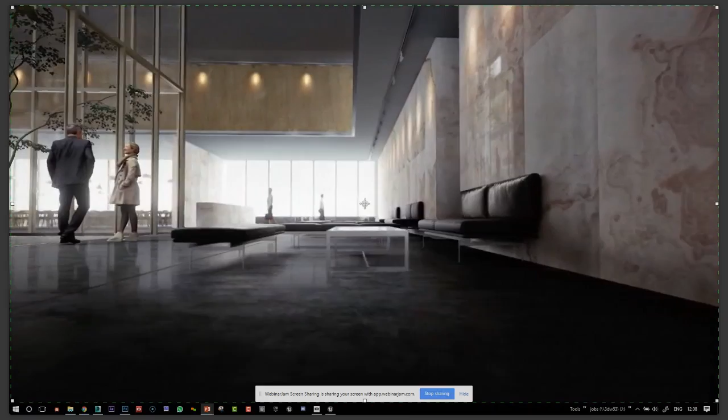So welcome to the Unreal ArcViz webinar number 2. In this webinar we are going to talk about workflow. Like Chris said, the idea is really to give you the tools you need to create projects a bit like right now. So I'm going to show you a range of things, and what we're going to concentrate on today is the workflow to go from A to Z, all the things you need to get cracking with the software.

So for that, we are going to start comparing these two workflows. One I call the V-Ray workflow, and the other one, the Unreal workflow. So what does that mean? V-Ray, I mean by that the offline rendering workflow. I kind of assume a lot of us will have used V-Ray in the past and will know what we're talking about. If you use any other renderer, that's absolutely fine.

The V-Ray workflow is all about things we're very familiar with, and I've just broken it down into this series of steps, which is obviously an illustration. In real life it doesn't necessarily happen systematically like this, especially in ArcViz. We'll start with our 3D model, which will either come from CAD, from Revit or Max, and then we'll apply our materials using textures and using Photoshop as a piece of software for that. And then we'll go and put our lights, environment, the sun, all the V-Ray GI and V-Ray sun and things like that we're all used to.

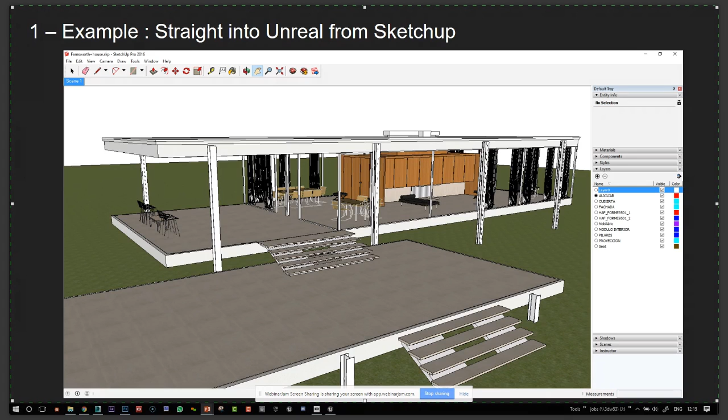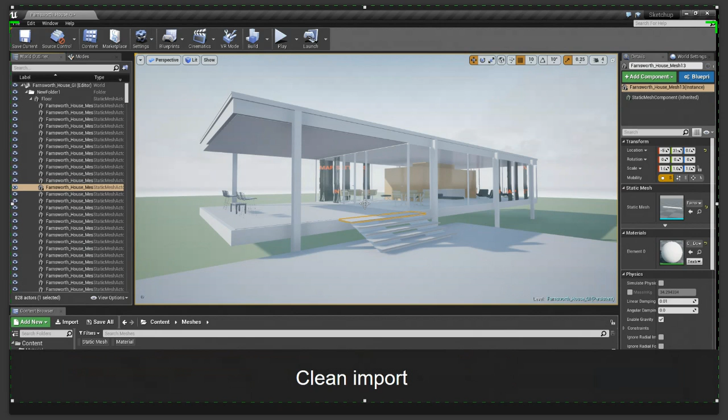So I thought I'd go straight in and show you an example of taking this very simple but nice model I found on 3D Warehouse, using SketchUp and going straight from SketchUp to Unreal. So I exported just one FBX, and it's a pretty clean import, and everything's more or less there. Everything's in the right space, not upside down. So it's worked pretty well. All the furniture is in there, and all the faces seem to be showing.

But there are some problems that we're having. We've got the wrong names in the file, and there's a very high number of objects. So this is something that is going to give us problems in the long term if we want to work with this file. We've also got, in this table, normals facing the wrong way. The faces are facing the wrong way, so that needs to be sorted out. And we see that we've got some pretty nasty invalid light map settings. Also, Unreal was throwing me lots of error messages when I was building the lighting and things like that. So this is something that is not a massive problem to tidy up.

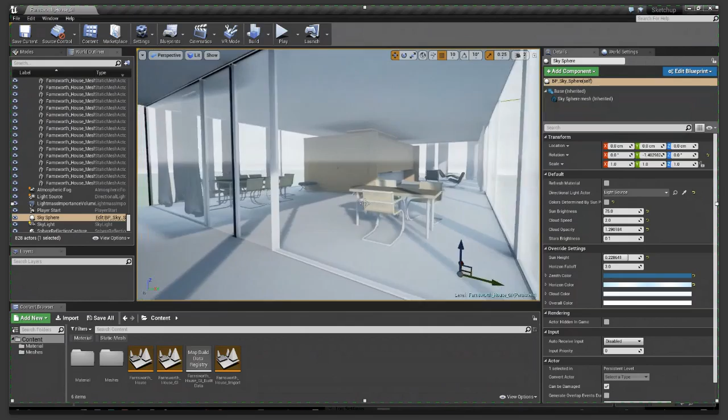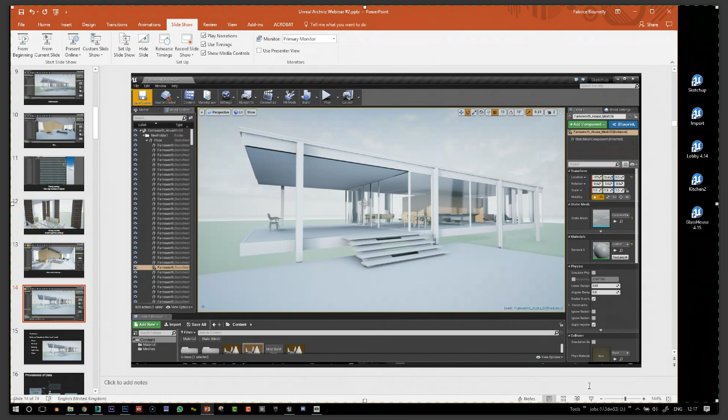So after a bit of cleanup, it's all more or less gone back, and I'll show you the scene here that I've got straight in Unreal. You know, it's not bad. It's really only taking a few minutes, half an hour or so, and I've got all the files, all the faces here. There's no massive holes. So, okay, it works, and while I'm here, to save on time for loading, I'll just keep loading these things after I've finished presenting, and then start again. So yeah, it works, and in conclusion, it's quick and it's valuable for this white card model for pre-visualization.

So now I'll jump back. It's great for concept, for massing, for light studies and views. So it's something that works, but as I said, it's not ideal for long term.

One thing: if you're going to work this way and import files straight from SketchUp into Unreal, the thing to not do is to do what I did and import as one file. The thing to do is really to export different FBX files, at least to separate the building from the furniture and things like that. So we're going to go into more depth on how to organize the file for real time next. So let's have a look at that.

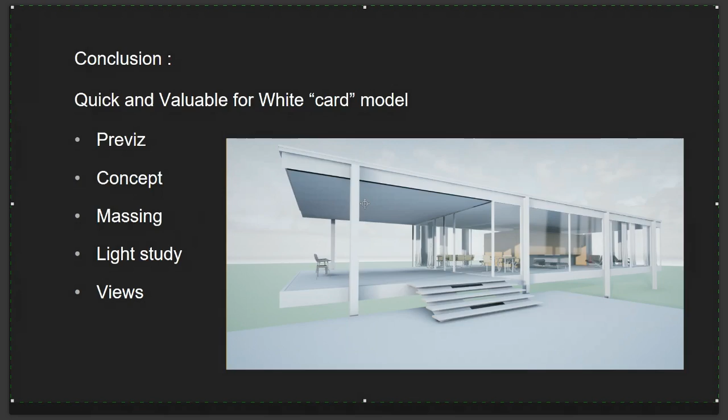So using 3ds Max is the professional workflow today. I haven't actually met anybody who doesn't do that in a professional setting, whether it's a visualization agency or architecture firm. It enables us to have clean geometry to manage, and because again we have to deal with the fact that everything needs to be real time, we need to enable Unreal Engine to render a large number of images per second, so we'll need to optimize.

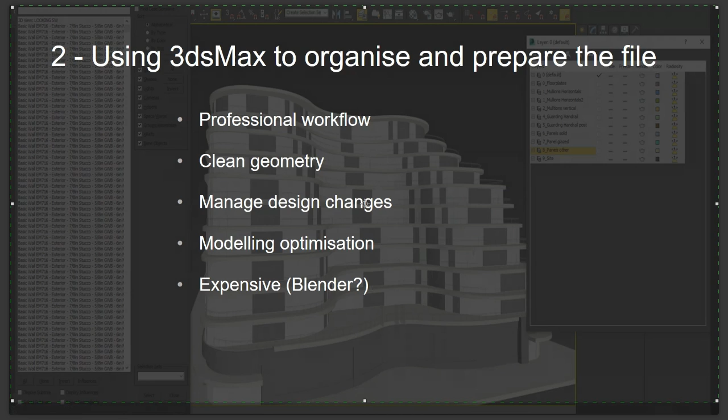The problem with that is, well, 3ds Max is pretty expensive, and so I've just put Blender here because I hear that it's a viable alternative. People are really using it in the professional visualization industry, so it's something to maybe keep an eye on for the future.

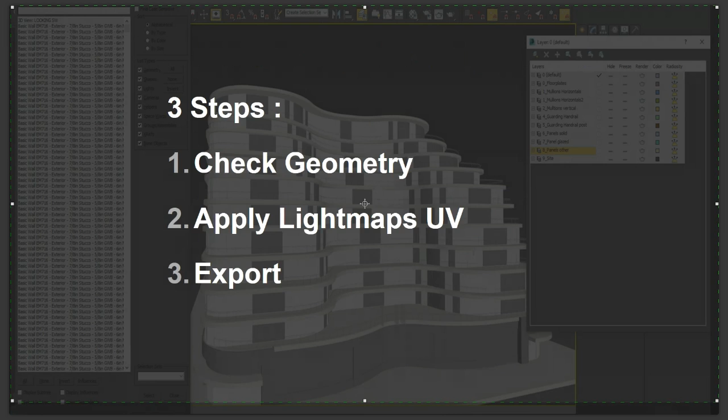So once we've got our application, we're going to have three things to do in there. We have to check the geometry once it's come in, and we have to apply the light map UVs. So we'll go over that in a little bit more detail. And then we have to export. So what does that mean? We will need to keep this file organized.

So thanks to TiltPixel for letting us have this model. It's very kind of them. And so this was a file that came in as FBX. And as you see, I imported it. It was just one FBX, and it's over 4,000 objects in here, and all these came named as BIM-like entities, and they all came in on layer 0. So I had to, not remodel, I had to reorganize this file.

And so if you were to import that and the layers did come through, you would probably have to reorganize the file anyway, because the file that was given to you will probably have XREFs in, and the layers won't make sense. So it's a very good idea to begin to have a little bit of strategic thinking about how you're going to organize that so that you can carry out the 3 steps. One, which is to check. So effectively, you might even have to check each object one by one and make sure they're right, make sure the faces are facing the right way, and so on.

And then we'll have to apply our light map UVs. So we'll need to be able to turn some of these layers off and make sure we've done it all. And then we'll have to export. So again, we don't want to get confused and export things twice and so on. So it's worth having a little think about how that's going to be done.

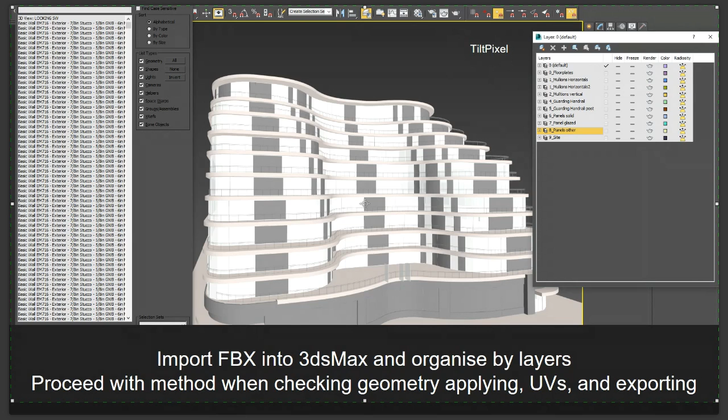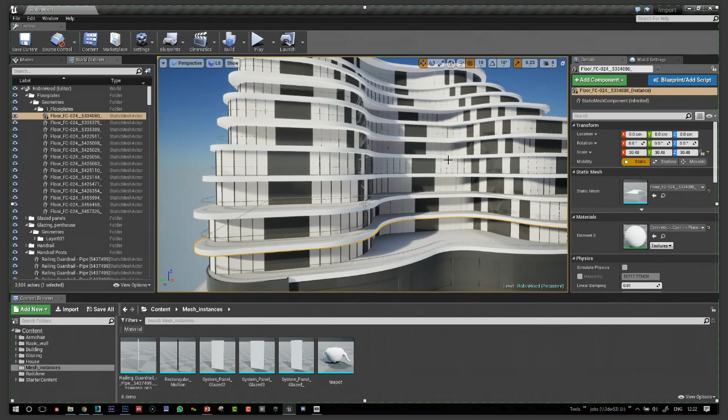So I'll just jump in the UE for this one, just to show you how this building has really come in very, very clean. In fact, I've used the piece of software that Enterprise is currently working on, and that Chris will give you a demo on at the end of the webinar. But these have all come in very, very clean. It was very simple to do.

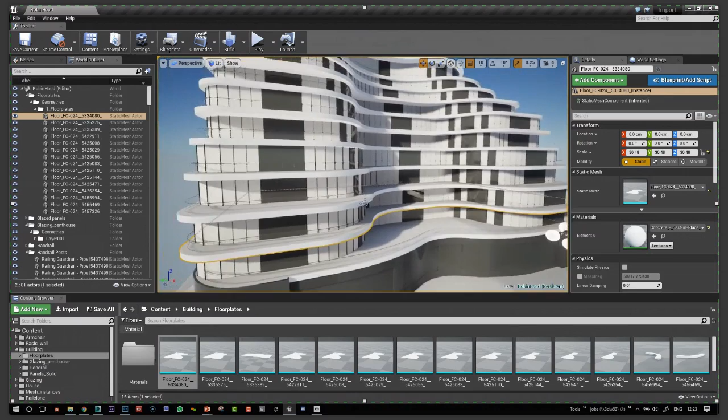I just selected the plates, and they all came in with a proper folder structure and properly named with the original name, not the name of the file, and so on. So that's really exciting for us. So unfortunately, it's not released yet, so we'll have to do some of this manually.

So another thing I wanted to show you in here is how when we import our objects, we have the option to use object instances. So for example, in this facade, all the panels, there's only 3 actual panel geometries that were imported into the software, and all these were placed using a script, which I'll give you the link to in a minute.

But it's a very efficient way to work in Unreal, and this way we can have a large number of objects and a very small footprint. So again, I'll show you a little.

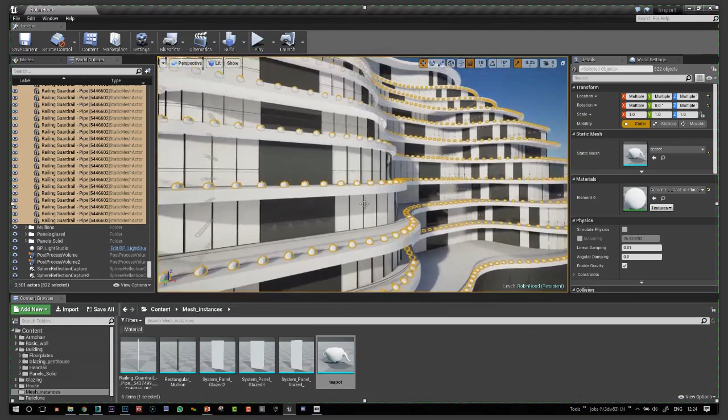So select all these handrails, and then because I thought I can't give a 3D demo without a teapot in it, I'll just show you how that works really well. And I can instantly change all my handrails to beautiful teapots.

But what that's basically illustrating is when we've got design changes to do, if we had to replace all these handrails in Max, 800 objects, and then swap them and re-export them and so on, it would be quite time consuming. Whereas here they've been placed and instanced, and all I need to do is import one other guardrail and swap it, and then job's done. So that works very well.

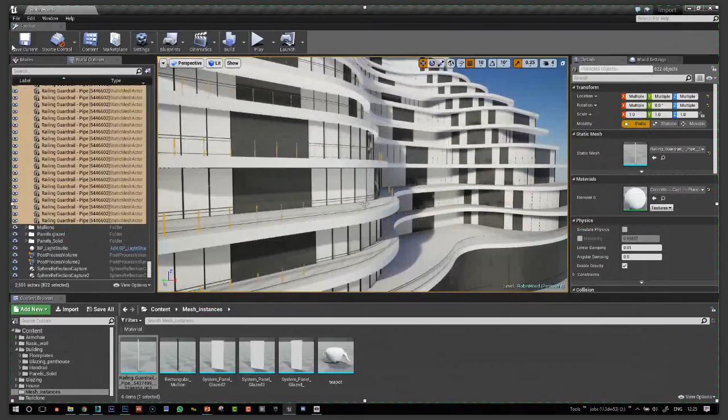Another thing is, now I swap back to my... so if I do my little maintenance, I'll close this down and save you staring at the screen while it's loading, and I'll open my next one. There you go. That's done. So that's that for this model.

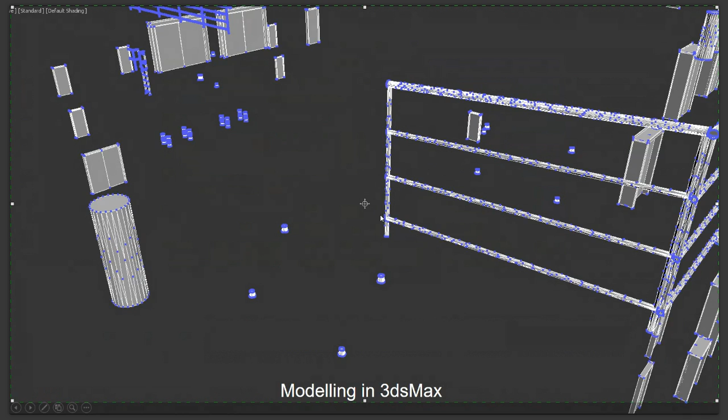One other thing that is going to happen when we start importing data into Max is that we are going to have some issues with the geometry. Some of this could work, but it could cause problems, things which would be slightly undesirable or not enough quality, wrongly tessellated, and so on. So we will need to model in Max as well.

So I've just prepared this little speeded up movie here to show again a sort of best practice. Where's it gone? I'll start that again and fast forward just to show a problem that we're getting here. When this hole in this wall was created using a Boolean, we got these funny lines here coming for us. And then when we do the chamfer, it's giving us a problem.

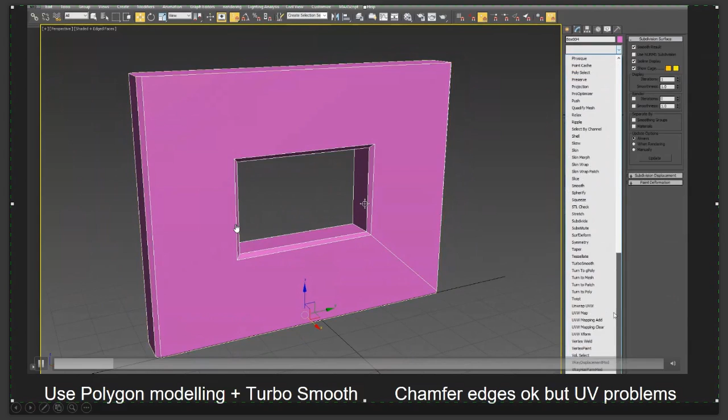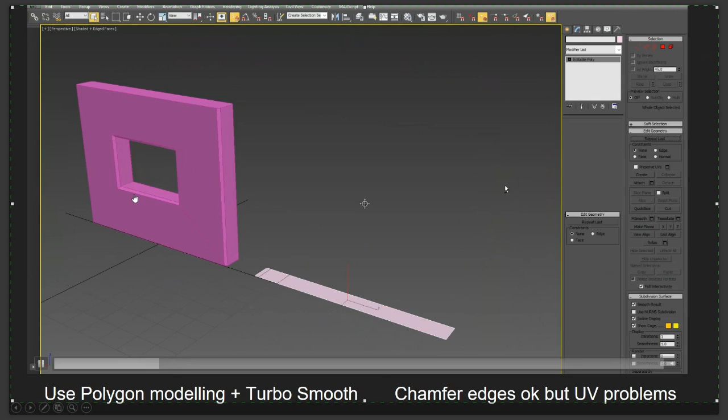The reason I did this is that I get a lot of questions, people asking me, is it okay to chamfer in Unreal? Because it's a very good practice when we model our interiors or furniture to give that chamfer that's going to catch the light, and it gives a much better model overall. So yes, it's definitely okay to do chamfers because it makes our models better.

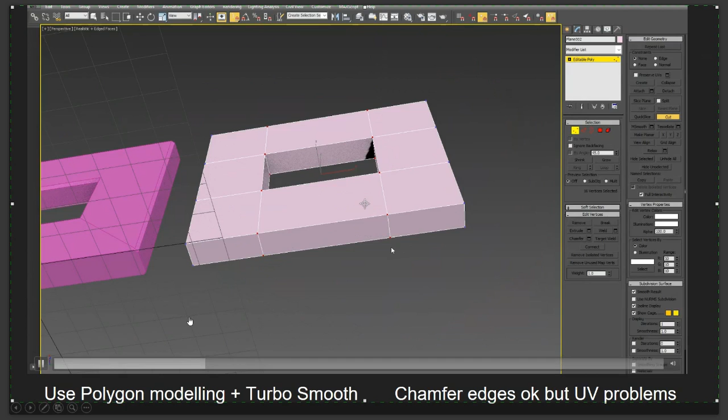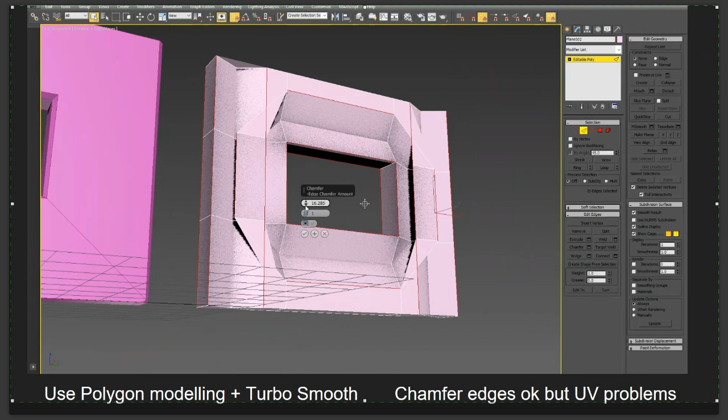But if we do it with the original Boolean and these funny shapes which give us these problems, then we lose the control and it's working against our favor. So here I'm showing you the proper polygon modeling. I'm sure most of you are familiar with that, but if we come from CAD, it might be a little bit foreign to us. It maybe takes a little bit of working out, but once you've done it, it's very easy. It gives us all the control we need over the chamfer, and I'm just going to fast forward a little bit to the UV mapping.

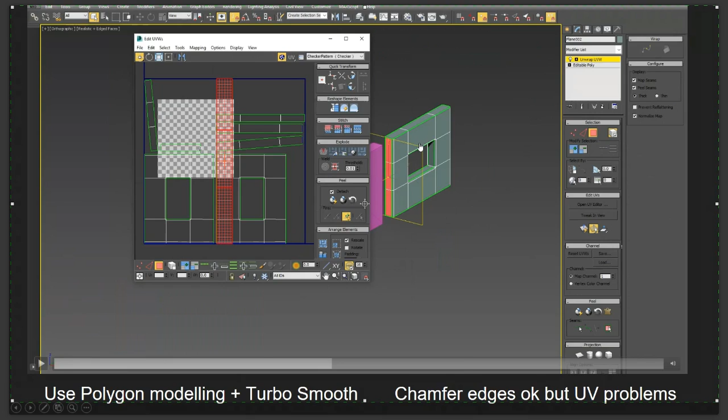We'll go over this in a little more detail, but here you can see that my UV mapping is controlled. I can see where all my faces are, and all these little chamfers are appearing in the right place. Whereas the original UV mapping gave us problems because of the way it was modeled and because of the automatic unwrap. So anyway, I'll carry on and show you a bit more of how we imported some data and used this instancing.

So let's move on to my lobby scene in here. I'll go full screen on that. Typically, in a V-Ray workflow, this whole side of this lobby would have been collapsed into one object, or even possibly this entire set of mullions would be one object. I would have used a clone tool, so it would have been one object.

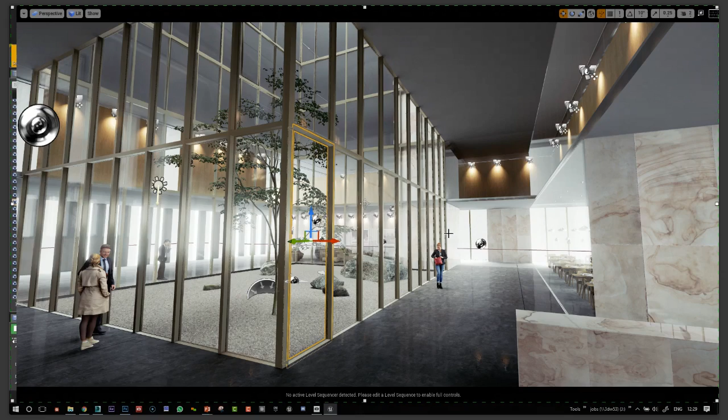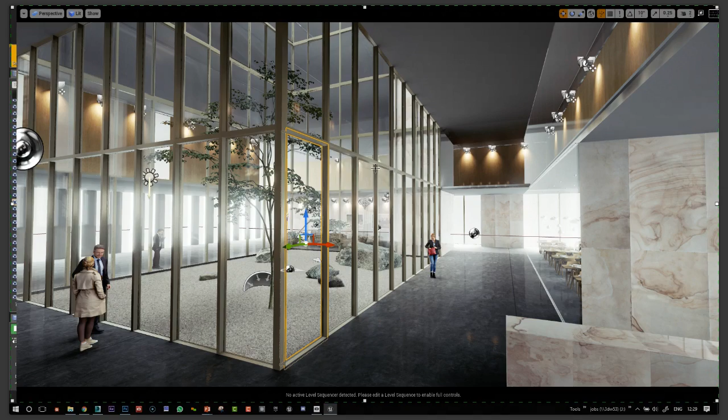What I ended up doing is using these instances. I'll just zoom in regarding the chamfers: the actual geometry is very, very detailed. There's tiny little chamfers everywhere. And so it enabled me to keep this very detailed geometry, place all these individual elements, and then they rendered much, much more quickly than being all collapsed into one object.

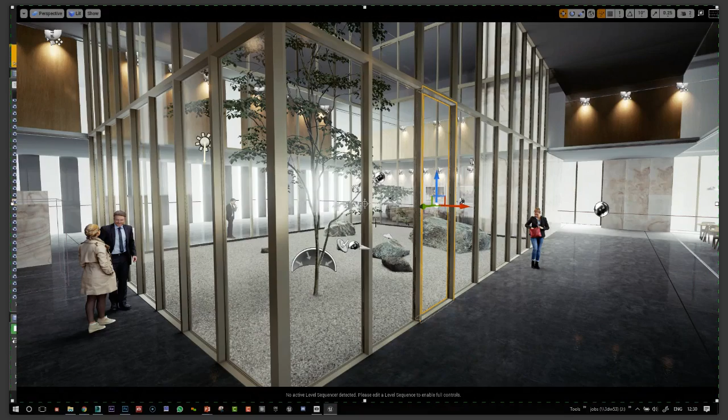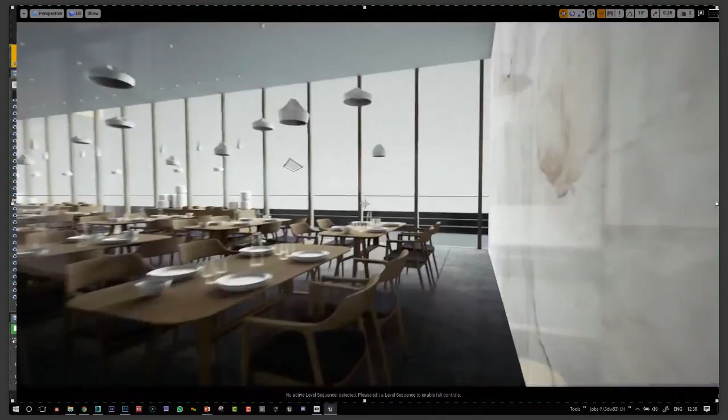For example, these rails that go over the entire length of the scene are very inefficient to render as well, so it would be much better to at least break them up. Another thing here, in this restaurant area, the chairs. I hope I'm not making you dizzy by moving too fast, but the chair and all these objects were all instanced. If I select my chair, you can see that there's only one chair, and it makes it all very clean and easy.

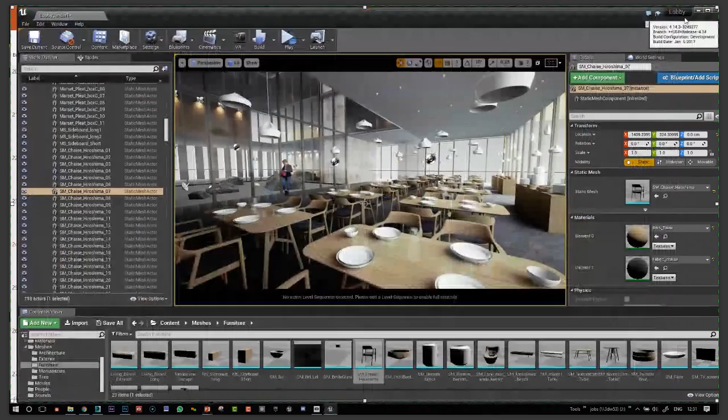And if I want to replace this chair, all I need to do is swap it out like this for another object. So that works very well, and I think Unreal is very happy to deal with things this way. So I'll just carry on. Let me do my little maintenance again, and then lobby, and then I'll get ready for this one.

Okay. Back into PowerPoint. So in the lobby again, this is a scene that was in French. So thank you to Artefactory in Paris for working with me on this, to Eric and Dominique.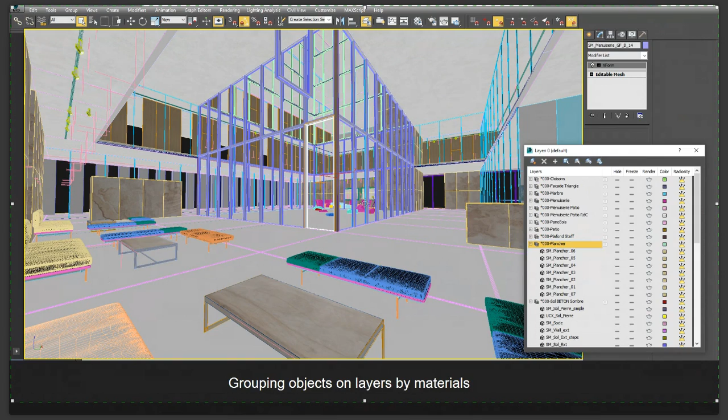And so again, we took great care to separate out the layers. It's rather ideal to not have too many objects on each layer, so that we can really keep track of them, and each one is properly checked. Yes, it does take time, but this is effectively the more professional workflow, where we check everything, and if we've got large numbers of objects, we instance them and export the one object that's been properly modeled.

Something to keep in mind as well is whether the object will be static or movable. By static I mean walls, the glass, the floors, things that are part of the building, and those can be exported as they are. On the other hand, the chair, although it's a bit confusing because here the mobility says static for the chairs, I exported them as movable objects, and these need to be moved to 0, 0, 0 in space before being exported.

So again, it's a little bit of strategic thinking. What is going to be static? What is going to be movable? The movable objects like the plates and the glass need to be placed at 0, 0, 0 in space before being exported. Thankfully, we've got some scripts that help you do that, and I'll point these out in a minute.

But before I do that, I would like to point out this asset naming convention that you can find on the wiki for Unreal Engine. This is something that I ignored at the beginning, thinking I can do my own naming, blah, blah, blah. But to be truthful, I came back to it, because it's very good to know that it's there. If you decide that your things are getting a little bit confusing, this is really here to help. I now apply it for all my static meshes and textures and so on, and it's worth knowing about.

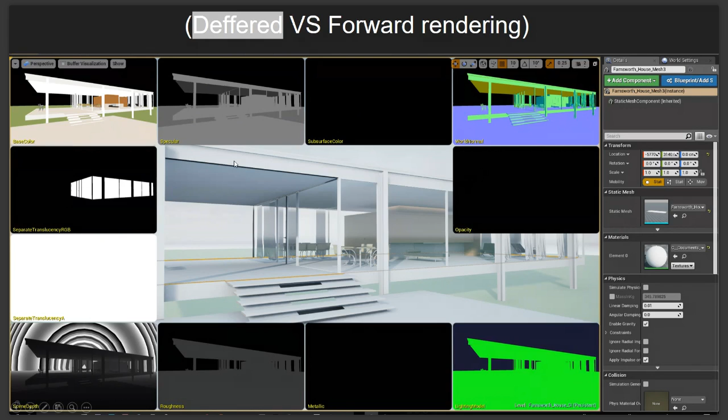But as opposed to forward rendering, which is the way V-Ray works, where we've got the camera and V-Ray just fires a ray from the camera, and when that ray hits the geometry, it queries what's going on with the lights, materials, and so on, and returns a pixel. So there's sort of one pass, and then the deferred rendering, I think it might be 7, or I don't know quite how many. So with that in mind, this is the new workflow in Unreal.

We've got our skylight, and within that skylight, we will put whether it's the default Unreal Sky, we've got HDRs, we've got also the possibility to add blueprints to illuminate our scene, or to give the sky illumination. And the skylight is going to be the element which will throw the light. So it'll take the color of the environment.

What Unreal also will do is use the environment color. So this is where you see the different renderers at play, where in V-Ray, for example, if we had an environment color and then a skylight, the environment color would be completely ignored, would be overridden by the skylight. In Unreal, that's not the case. They will both add on top of each other.

Here again, also the atmospheric fog will contribute to the lighting of our scene, whereas in the V-Ray workflow, what's done most of the time, for example, is to add the fog in post-production. So the fog will have no impact on the color of the scene or the color that the skylight will take.

Next one is the direct light, the sun. That's pretty straightforward. There is no sun. It's just the direct light. So in V-Ray, we've got the V-Ray sun. Here it's just the direct light, and obviously the particularity of the direct light is that all the rays are parallel. So that's what makes it look like the sun.

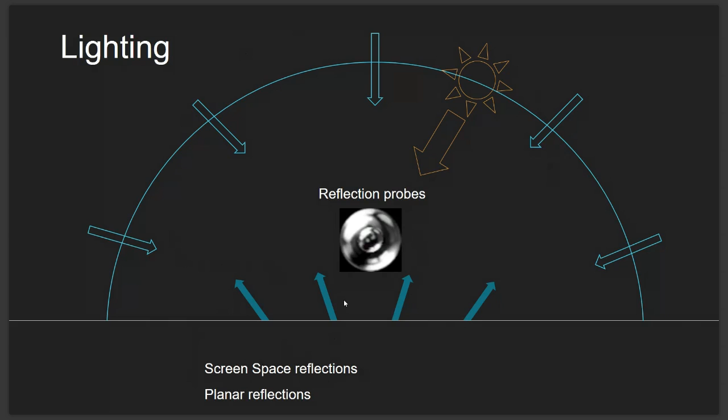So how do we get a clean render with these soft shadows, which is what we're trying to achieve in all our renders? For that, I'm just going to show you a little bit of the setup I've got for this kitchen scene here.

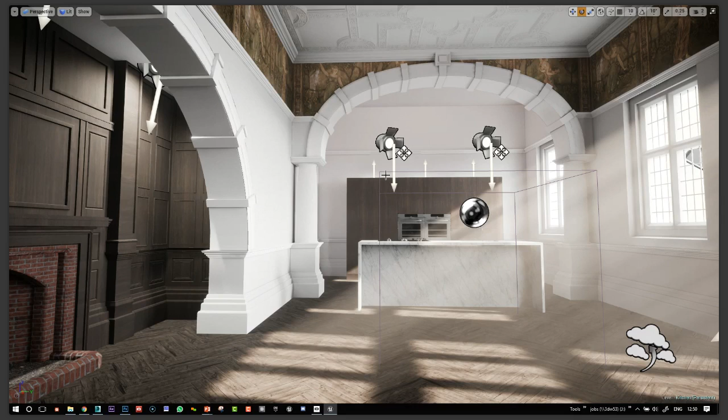So here, what you want to do when you have your scene is press Alt and 0 on your keyboard, or go to this visualization and select light map density. This really gives you this very matrix-like view - and it really is like the matrix, because it's showing us all these grids on these objects.

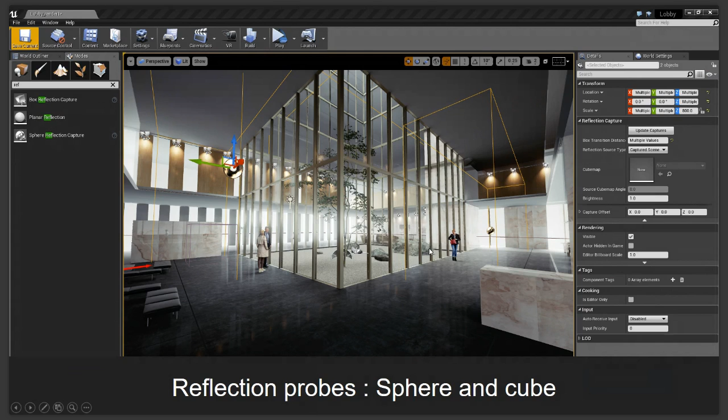Another thing to know about these reflection probes is that by default the resolution is quite low. If you go to Edit, Project Settings, and click on the Rendering tab, you'll see that you're able to change the resolution of your reflection capture. Maybe play around with that.

I would say before a presentation, or if you send your project out, turn that up. Or when you finish working with your project, turn it up. When you're working with the probes, it makes things a little bit slow, and there's a bit of a delay, so it's a bit annoying. Maybe keep it low when you're working, but it's good to know that you can up these for the reflections.

I'll go a bit quickly because I see the time is ticking, but this is planar reflections at work in this lobby scene on that floor. Here you can see all the reflections are accurate, the mullions are reflecting in the floor, the lady is there, and so I systematically use the planar reflections for the floor now. It works a little bit differently, gives slightly different results, but is very accurate.

Just to know that, obviously, they're very expensive in rendering time, so you can't use too many of them. So that's the planar reflections.

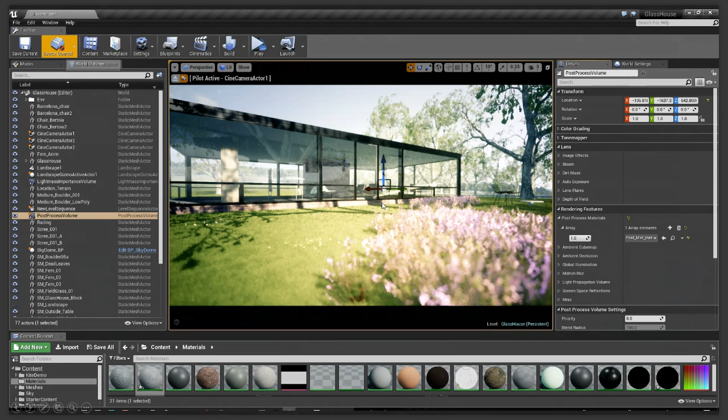All right, so just to finish, I'm going to give you a very quick one on the post-process. We'll talk about that again in the lighting, but this is very powerful. There's a whole subject in itself, and just to show that's the difference between an image which is pretty flat and then with a bit of post-process.

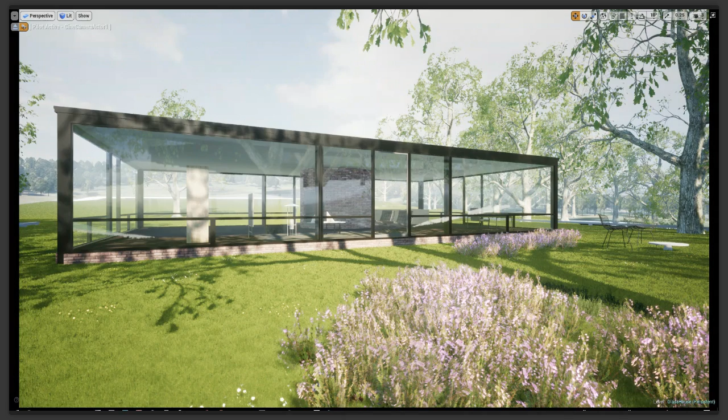I'll just show you super quick what we've got in here. With my post-process volume, there was quite a lot of work that went into it, but the big one is to use this color grading LUT. There's plenty in the documentation about that, and effectively it's just doing your adjustments in Photoshop, and you can add that straight in.

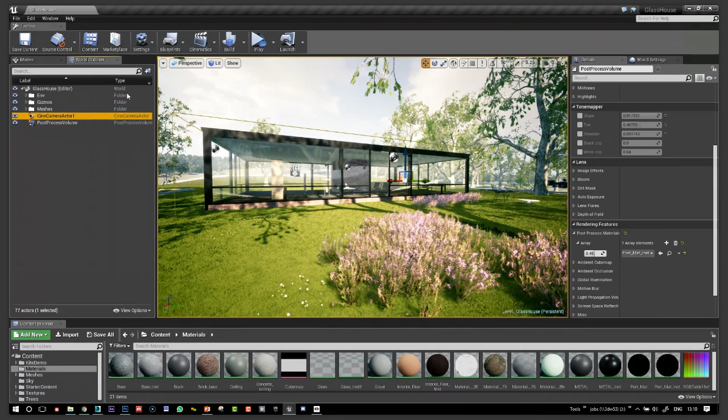That's very, very effective. And I thought I'd show you something a little bit confusing, because we've got this depth of field here, and that's quite a tricky one to use. In order to do the depth of field, now we've got this new Cine Camera Actor, I'll make that a little bit bigger here, and when the camera comes in, you've got this lens settings.

And what I do in order to play around with the depth of field is bring my minimum stop to an incredibly unrealistically low value, 0.2 here. And when you work with the Cine camera, you change your aperture, and that enables you. So here I'm on 22 and everything's crisp.

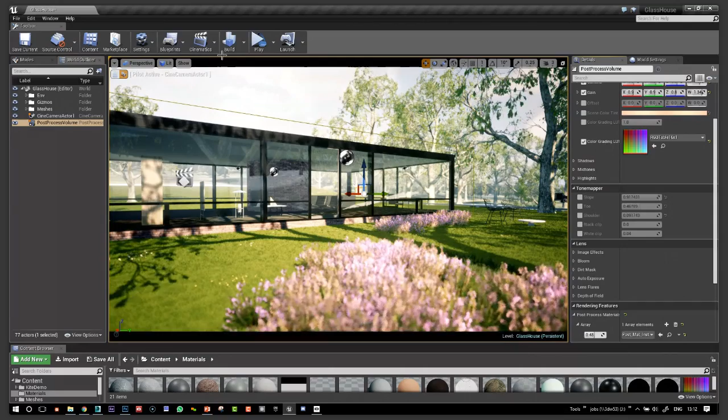When I bring it way down, you see my foreground and background get incredibly blurry—I'm exaggerating here. So I use this debug plane to choose where my center of focus is going to be. Here I've got my chairs in focus, and I can change my depth of field by changing the camera aperture, which doesn't impact the exposure. The exposure still has to happen in the exposure settings of the post-process volume, and we'll talk about Tone Mapper and all that in the lighting webinar.

I'll finish off quickly. Interaction and output is a massive subject—we've got blueprints, sequencer, VR—but I'll just say use the templates for VR and first-person shooter for navigation. You can navigate without them when you open the editor, but it's really worth using the work that's already been done there.

In output, quickly, if you're a freelancer or working in-house, there's great value in just preparing files to be viewed in the editor—press F11 to make it full screen, and you're there. It's great for client presentations. If you've got an Oculus or Vive and haven't tried the in-editor VR on version 4.16, do so, because I think it's really going to affect how we work in the future. All these other options I'm not going to go through, but they're increasing in difficulty, with mobile VR being the most difficult to output and deliver to clients.

For high-res stills, I'd like to point out the Ansel photography plugin is working very well, and it allows you to take stills up to 60,000 pixels across. It's all there, it's free, and I'm not going to show you how to use it here, but it's all on this page and it works very well.

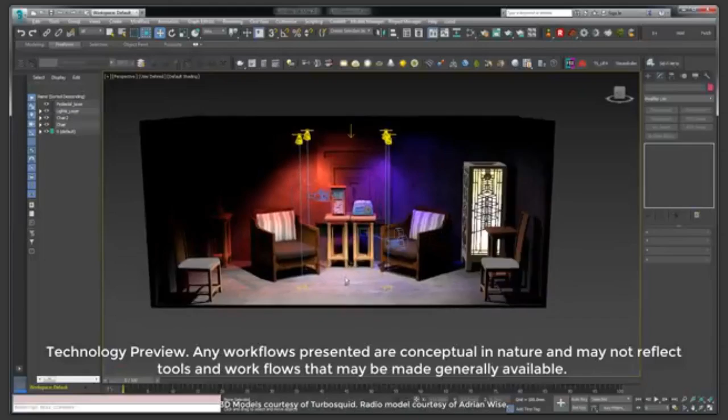We're going to take a look at a technology preview of some things we're working on at Epic. The goal is to make adoption of the engine super simple for people doing design and architectural visualization, and to address workflow issues we're currently seeing with people using the engine. The biggest hurdle at the moment is getting data in a fast and efficient way. While there are lots of different things to consider when moving data into the engine, if we can shave off a certain percentage of that work and make it easier, we believe that will really benefit our customers. So we've created technology that automates and accelerates that process.

I've got a V-Ray scene here, and it's V-Ray very specifically. We recognize a lot of people are using V-Ray for their work in 3ds Max, and we think it's important to replicate that workflow as closely as possible in the engine. So I've got a V-Ray scene with V-Ray materials—you can see some real simple V-Ray materials set up at the moment. I also have some V-Ray lights. If I choose my light filter and select the lights, you can see I have some V-Ray IES lights in here.

I also have a standard V-Ray area light there. You notice that some of these lights are just white lights and some of them are colored. So pretty simple setup. I also have some CAD geometry in here. If I click this and zoom in on it, you can see I have a CAD model of a radio that came over. Thanks to Adrian Wise for sharing that with us.

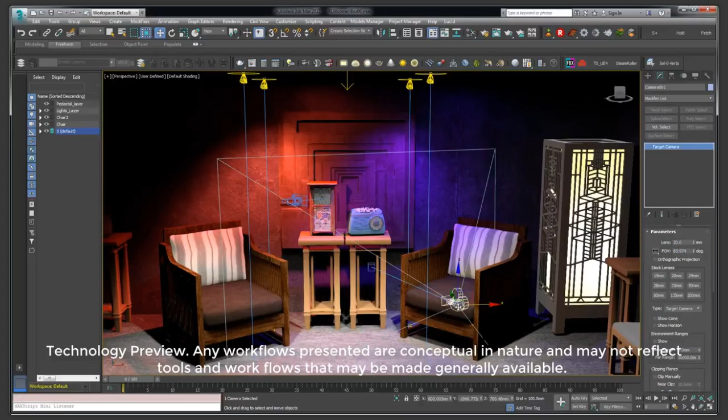And finally, you'll also notice that I do have some cameras in the scene. I have a standard camera here, and I also have a physical camera here. So two different types of cameras in the scene. Let's go ahead and move these things over to the Unreal Engine so you can kind of get an idea of some of the things that we're working on.

So I'm going to go ahead and choose File Export, and I'm just going to overwrite one of the files that I used previously. So we'll just say yes to that. So I've blurred out some of the things here, but you can see that basically we have some choices about some of the things that we want to assist with in terms of moving data from Max over to the Unreal Engine. So we have a couple of different settings there, but again, there's no guarantee that any of these things may actually end up in whatever piece of technology we should make available.

So I'll just go ahead and say export to there. And we'll let this thing export automatically. We'll say OK there, and we're done. Now let's hop over to the Unreal Engine. So now you can see I have an empty level here in the engine. I'll just go ahead and do File Import, and we'll go get that preview file.

And again, just blurring out a couple of things, but you can see we're going to have more options here. And we'll go ahead and import everything. And this does take a few minutes, so I won't cut the camera away, but I will actually accelerate this so that we're not sitting here waiting.